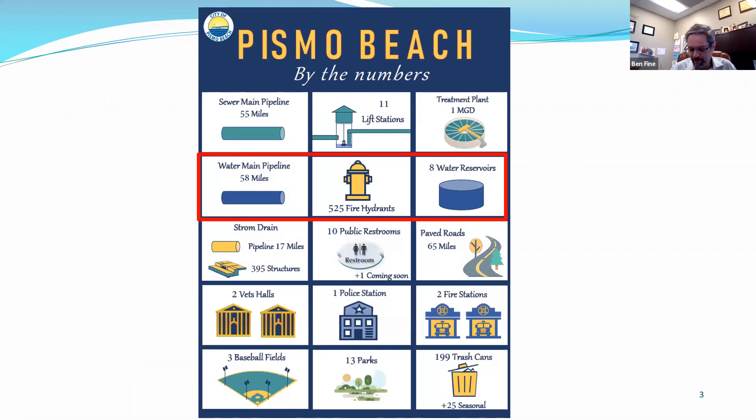But really what we're going to focus on is our water infrastructure. When you work in water and public works in general, when things are right, the public is completely blind to you. You are invisible, they don't even know you exist, everything's just great. But when things go wrong, people really get upset and you are the center of attention, they want to nail you to a stake and burn you. So if you're doing your job well, no one knows about it, and when you mess something up, no matter how small, everybody knows about it and they usually get pretty upset.

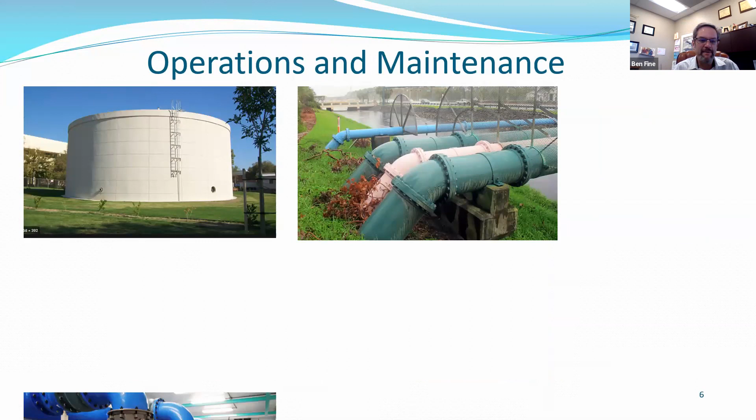As far as operation and maintenance goes, we'll look at reservoirs and the distribution system consisting of pipelines, booster stations, and valves. Looking at reservoirs, it's really important that you have an inspection program. Here at Pismo, we dive our tanks every 7 to 10 years.

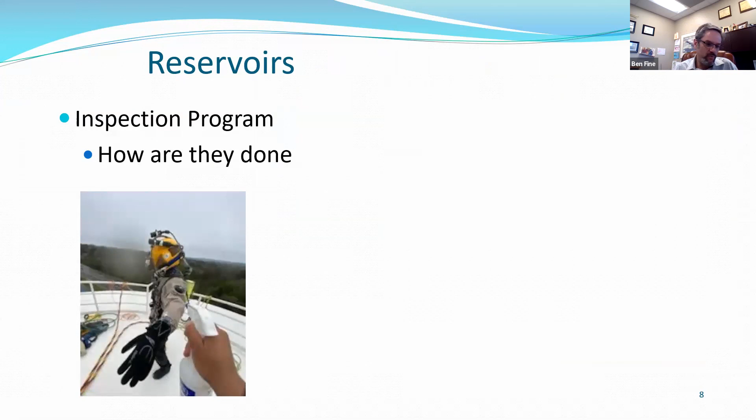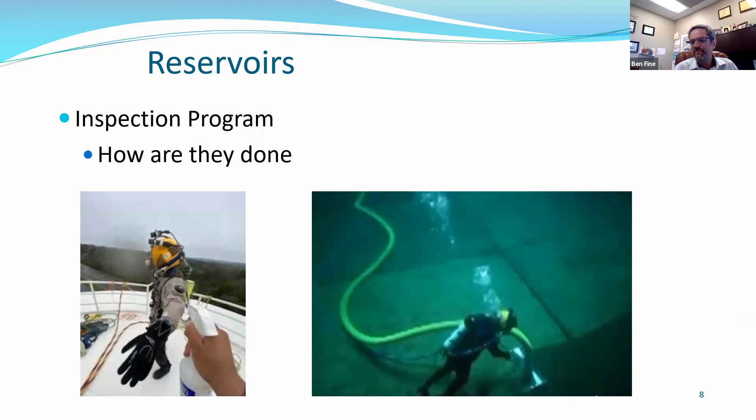So how do you inspect reservoirs? We dive ours. You have a certified diver, and the one we use is a registered engineer as well. He suits up, gets sprayed off with bleach, and jumps into the reservoir to inspect it. Then he provides a report with pictures on the condition of the inside and outside of the reservoir.

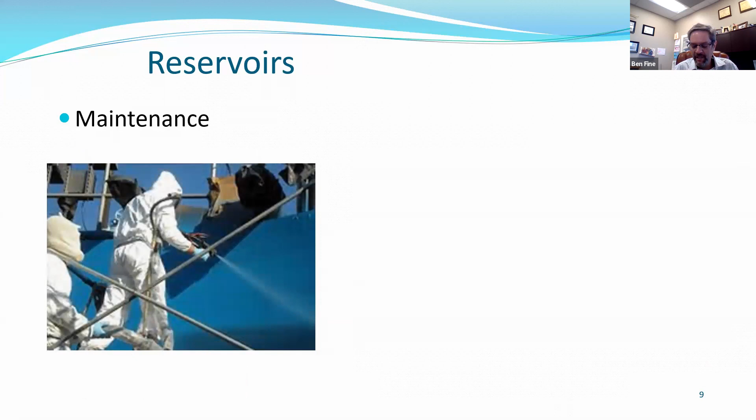Then we take that information and go out to bid for a project that usually consists of mitigating corrosion on the exterior and coating the exterior, and then cleaning and often coating the interior of the reservoir.

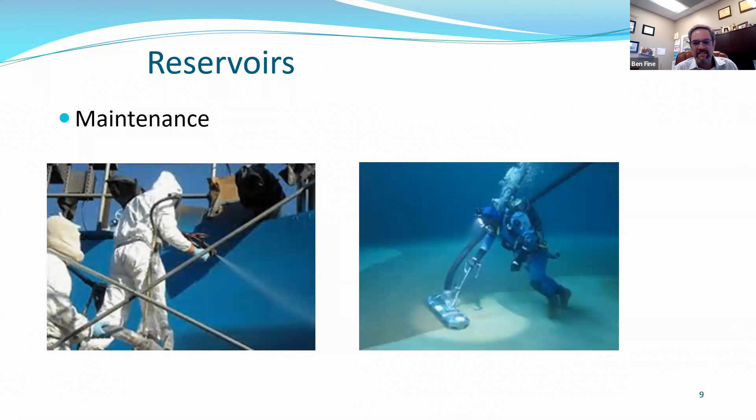At the city of Pismo, we have 2 concrete reservoirs and all the rest are steel. I bring that up because one of the things that's really important, especially with a steel reservoir, is cathodic protection, which is a way of controlling corrosion of the surface.

What it does is make the reservoir the cathode of an electrochemical cell. You do that by connecting it to a metal that's more easily corroded, a sacrificial metal that acts as an anode. Then you have an electrolyte between the anode and the cathode, which is the water inside the reservoir. Typically we'll use zinc, aluminum, or magnesium as the sacrificial metal to protect the reservoir.

Without cathodic protection, you can end up with a lot of corrosion. In fact, one of our reservoirs didn't have cathodic protection and the supports inside are pretty much gone. We're currently in the final design and will go out to bid probably in the spring to completely replace the reservoir.

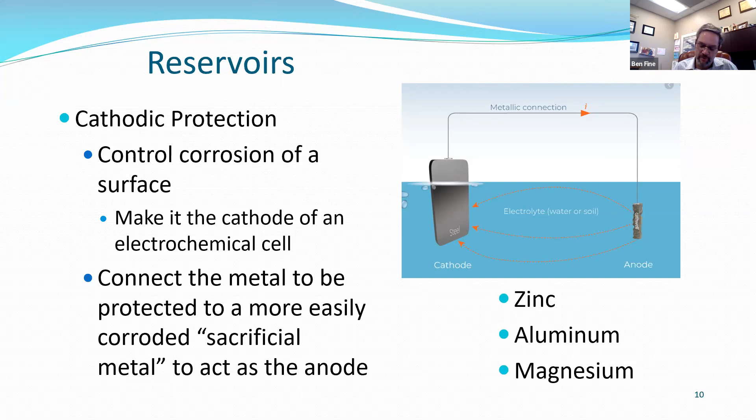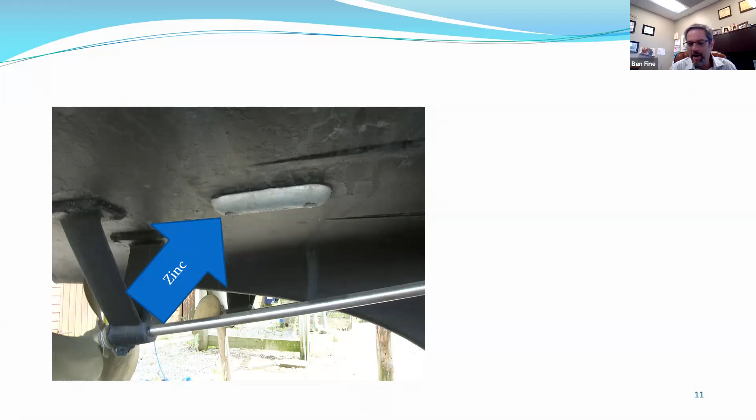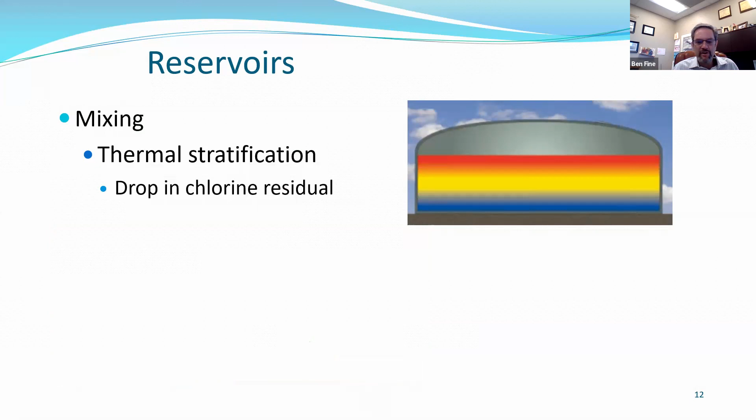Another form of maintenance or operation of the reservoir is mixing. Inside a reservoir, you'll get thermal stratification of the water. As the sun beats down on the top of the reservoir, it heats the water and it will separate into layers by temperature. What you'll see is a drop in chlorine residual, which is obviously not a good thing.

There's ways to mitigate this, usually with a mixer. This is a jet mixer. There's also a side mount mixer and a stand mixer that you can employ inside your reservoir to keep the water mixed up and ensure proper chlorine residual.

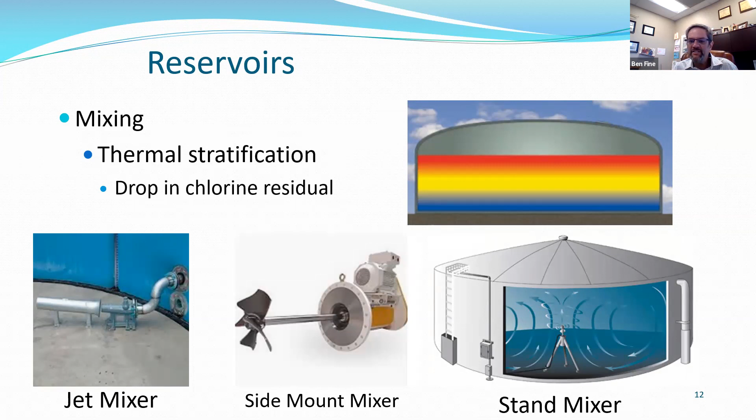As far as maintenance of the pipes goes, the big thing we do here in Pismo is flush our dead ends, mostly for water quality, not necessarily for the pipe itself. The operator flushes the line through the fire hydrant, which is in many cases how we do it, using a diffuser box to diffuse the water so it doesn't come out in a high pressure stream.

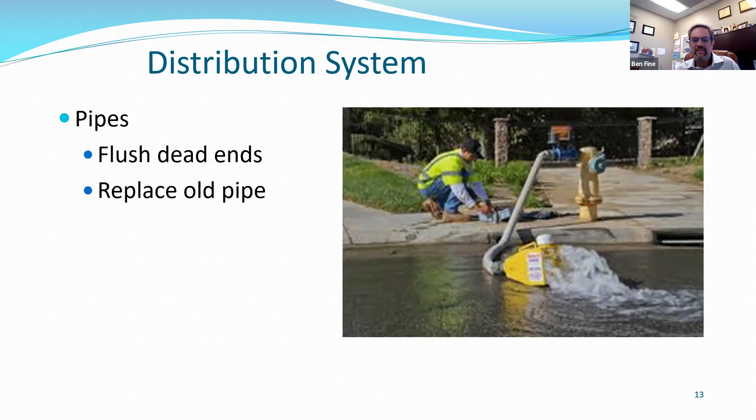And then also we'll throw in a dechlor tab to dechlorinate the water, because the water is safe to drink, but it's not safe to discharge to the environment, so we need to dechlorinate it.

It's important that you exercise your valves. In the olden days, it was done by hand. Many municipalities, including Pismo, have a valve turner where it'll exercise the valve. We go out and try to hit every valve at least once a year, and we'll open and close it 3 to 6 times. We also replace old valves, usually when we do street projects, because there's nothing more embarrassing than paving your streets and then having to come back and rip it up because a water valve failed.

One example of why it's important to exercise your valves, and it ties back to when things go wrong. When we were doing our Shell Beach Streetscape project, we replaced our water line and upgraded it to a 16-inch line to provide better flows. When the crews went out to shut off the water, we had a number of valves—4 of them throughout the project—that for whatever reason weren't exercised properly and wouldn't close.

So we closed the valve, but it's not closed all the way. The contractor thought, well, we can still replace the line anyways. They tried to replace the line and do the tie-in and they couldn't. So now they have to go to the next valve down the street and shut it off.

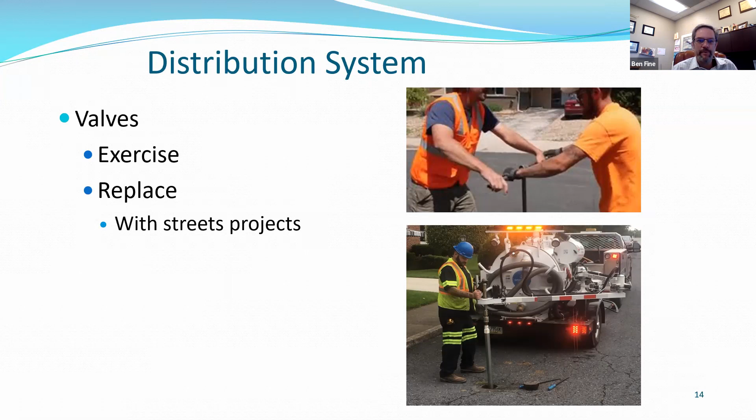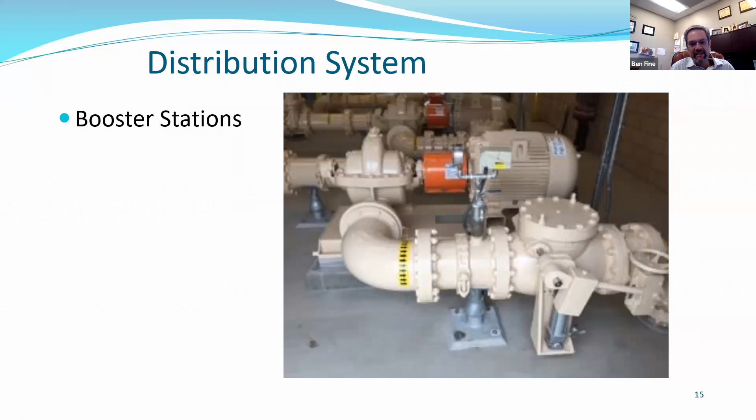Looking at booster stations, City of Pismo has 8, and there's quite a bit that goes into maintaining them, as far as pump maintenance, maintenance of the motors, and all the electronic equipment that goes along with it—the SCADA system, the pressure transducers and everything—to make sure it runs as needed when needed. About every 10 years, our guys will go and repaint everything to help protect it from corrosion from the elements.

I talked to you at the very beginning about water planning and how it can be difficult. State water and groundwater both follow a calendar year, whereas Lopez follows the Lopez water year, which runs from April to March. There's this chart I used to make for my city council, and they really loved it, but I really didn't. What I didn't like about it is that if you look at this...

I thought there was a laser pointer here. Maybe not. Anyways, oh, you know what? There is right here.

So if you look at, okay, in July, how much water do we have? Well, in July, we're midway through the state water year. We're at the beginning of the Lopez water year, and it's hard to say exactly how much water we have. When I generated this report, I said our remaining entitlements is 2,145, but that was in August. And state water runs out for the year at a different time than Lopez. So do we really have 2,145 acre feet, or do we not? Because at the end of the state water year, what happens to that leftover water that we did or didn't use? It becomes really difficult to convey to the council exactly how much water we do have.

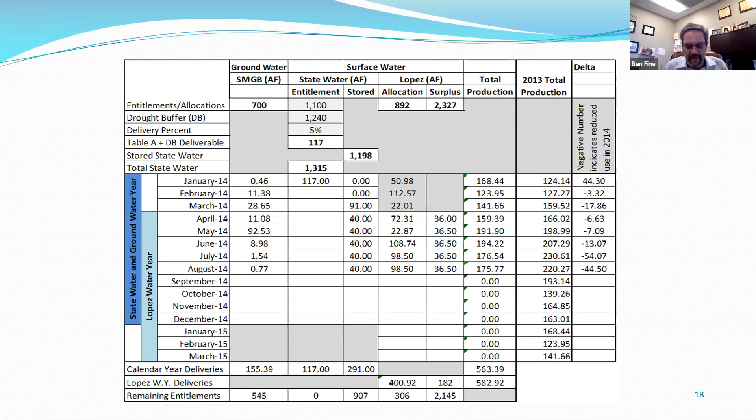So I actually did away with this chart. It kind of got the idea across, but most of them, it confused them more than it helped them, even though they're the ones that asked for it.

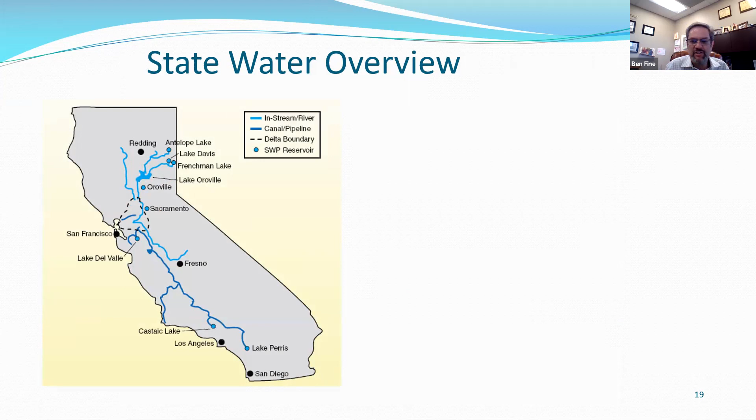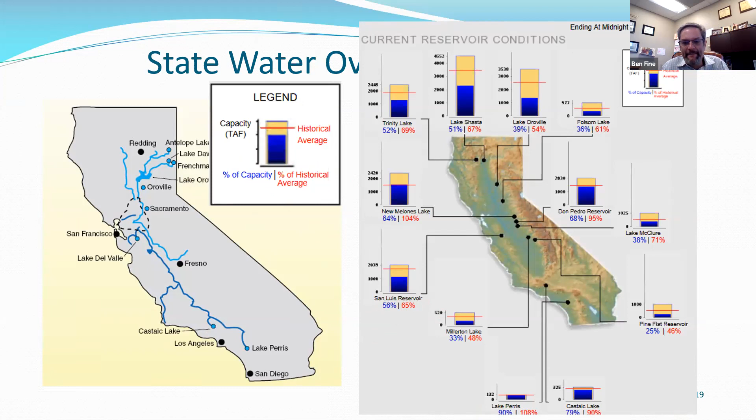This map here shows where the reservoirs are as of March 11th. You can see the blue number is the percent of capacity and the red number is the percent of historical average. Of significance to the Central Coast and us here in Pismo is San Luis Reservoir, which is at 56% capacity and 65% of its historical average. We'll talk a little bit more about San Luis Reservoir later.

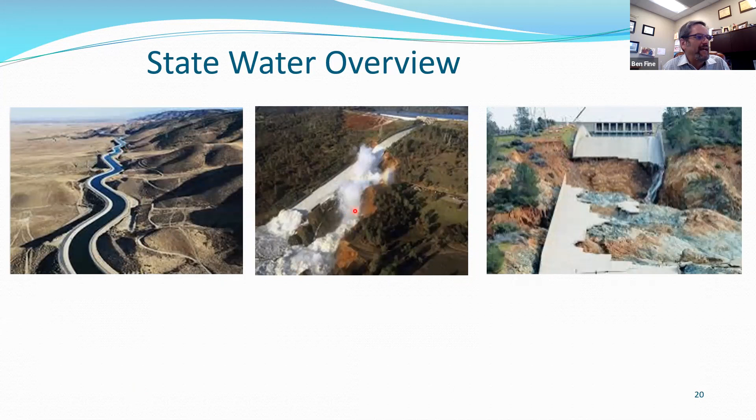And then these pictures show some state water infrastructure, an aqueduct, and you can really see how long and vast it is. Another thing to note is it's actually quite vulnerable. The State Water Project provides drinking water for much of the state, and it's just an open aqueduct. I threw these pictures in here - this is the Oroville spillway that experienced some failures a few years ago. Just wanted to throw them in there.

As far as state water goes, most state water contractors or subcontractors have what's called a Table A allocation. For the city of Pismo, the county recognizes 1,240 acre feet. We did sell 100 acre feet to a third party, so we have 1,140 acre feet. You can also buy what's called drought buffer, and we do have drought buffer in the amount of 1,240 acre feet. Drought buffer helps to improve the reliability of state water. It can only be delivered when deliveries are less than 100%.

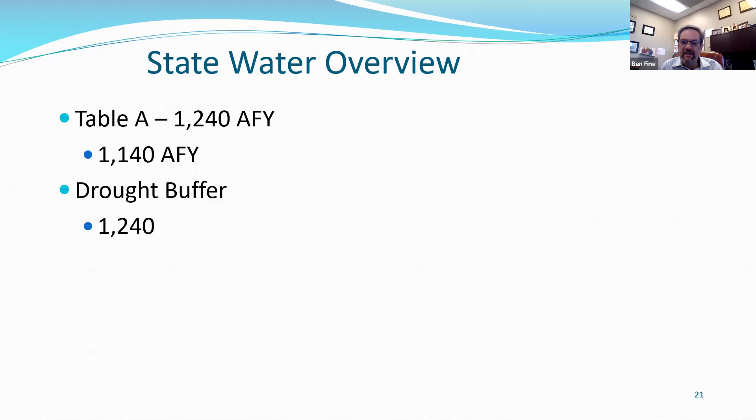I'll show you how that works here in a minute. It also increases the amount of water that you can store. So when deliveries are at 100%, the city of Pismo gets 1,140 acre feet - it's actually 1,240, but there's that 100 off the top that we sold. Then at a 50% delivery, we get 50% of our Table A plus 50% of our drought buffer, so we end up with 1,190 acre feet. You can see how the drought buffer really helps to improve the reliability of your water delivery. One thing to note is in no case may our deliveries be more than our Table A.

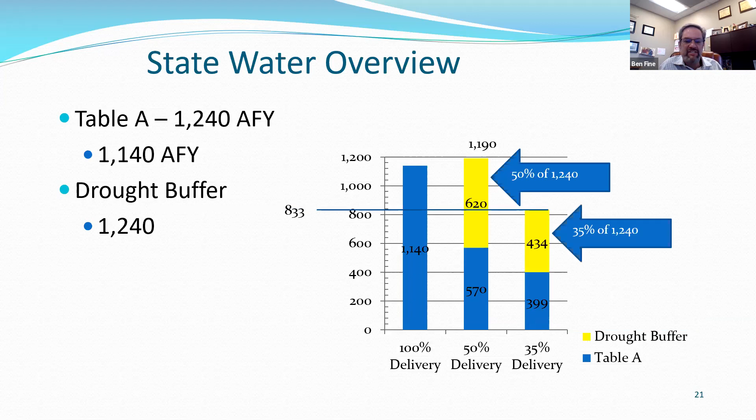So the drought buffer can only make up to a full allocation of our Table A allocation. Another example: at 35% delivery, we'd end up with 399 acre feet of Table A, 434 of drought buffer, for a total delivery of 833 acre feet. So you can really see how that improves the reliability.

So you can see that while state water is really beneficial in that it's geographically diverse - it can be completely bone dry here on the Central Coast, but if it's raining up in Northern California, the State Water Project will have a healthy delivery and will be okay. It's good in that sense, but you can see that there's a wide fluctuation in the deliveries, and that makes it hard for water planning.

You can store state water, and it's a little confusing to some on how that works, but there are equations you follow. If deliveries are between 0 and 50%, you can store 25% of the available water. Your available water is your Table A plus your drought buffer. Right now our deliveries are at 10%, so we can store 25% of our available water. Take our Table A plus our drought buffer, that's our available water, and you can store 25% of that.

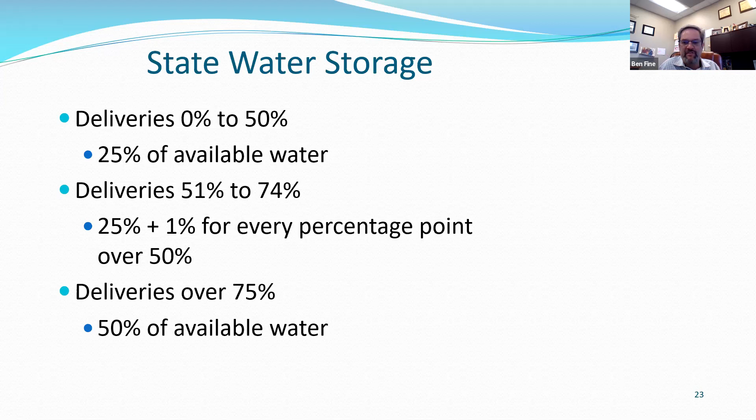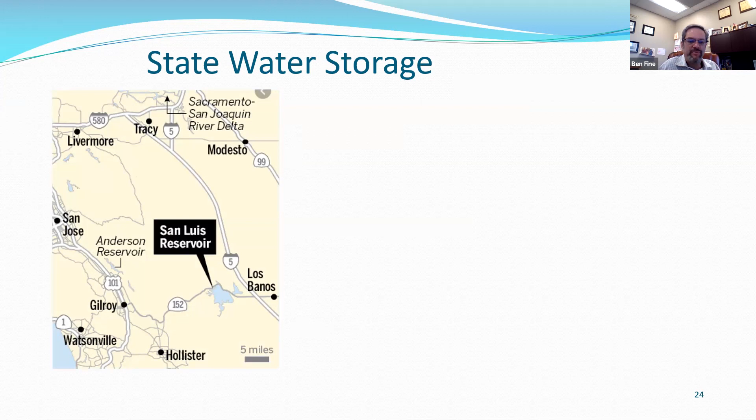So where is that water stored? It's stored in San Luis Reservoir, which is why San Luis Reservoir is so significant to us. One of the problems with storage in San Luis is we have zero local control. It's a little difficult to get the water delivered, not extremely, but there are some hoops to jump through with the county, since the county is the contractor. But more importantly, when San Luis Reservoir spills, we lose our stored water.

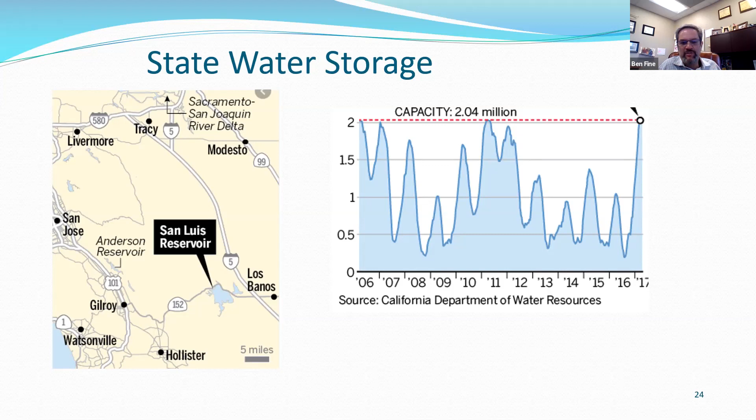San Luis Reservoir is an off-stream reservoir. There are no streams that feed it. There is a small watershed, but most of the water in San Luis Reservoir is piped there through the State Water Project. Most of the spills we see are from moving water through the Delta. There are real constraints on moving water through the Delta, mostly environmental constraints dealing with endangered species. So when there's a window to move water through the Delta, depending on how the other reservoirs are looking, DWR will pump a lot of water through, and that causes spills in San Luis, which means we lose all of our stored state water.

Lake Lopez, I'm sure many of you are familiar with it and have played there. It supplies drinking water for what's referred to as the Zone 3 agencies. It's owned and operated by the San Luis Obispo Flood Control and Water Conservation District, Zone 3 for short, which includes Arroyo Grande, Grover Beach, Pismo Beach, Oceano Community Services District, and County Service Area 12.

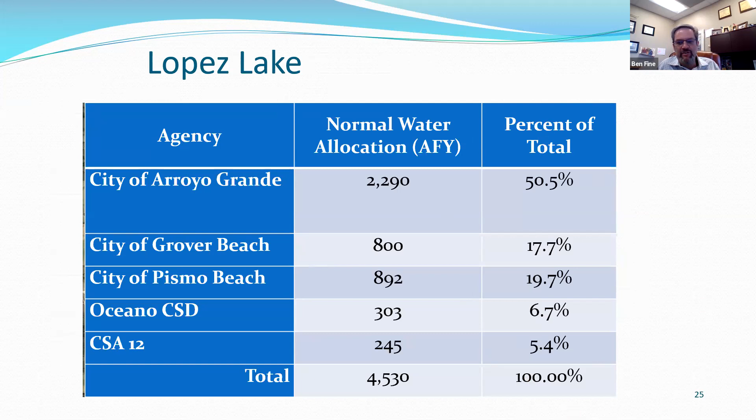So these are the allocations of each agency, and what's of particular importance is the percentage. The reason is when we don't use all of our water in a given year from Lopez - we have 892 acre feet - let's say at the end of the year we had 100 acre feet left over, that water goes into a surplus water pool. Each agency is entitled to the water in the pool by their ownership percentage of Lopez. So if the city of Pismo saves 100 acre feet of water, the city of Arroyo Grande is entitled to 50% of that surplus.

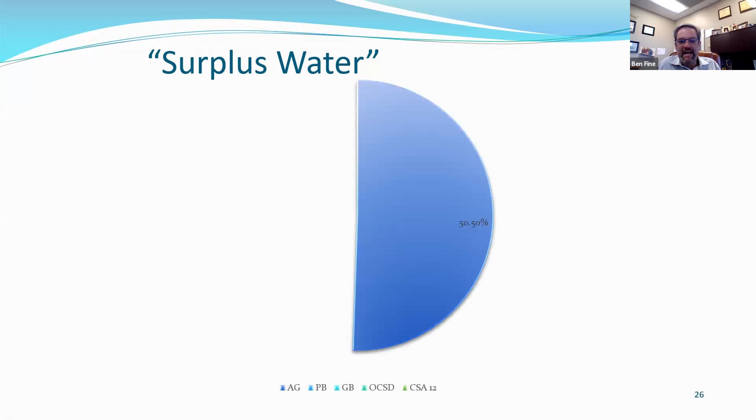We only get 19.7 acre feet of the 100. Grover Beach could have access to 17.7 acre feet of the 100. OCSD just under 7%, and CSA 12, County Service Area 12, 5.4%. Another caveat of surplus water is you have to use it the following year. So in addition to only getting 20% of that water, or said another way, losing 80% of our saved water, we have to use it the following year if we want it, and if it's not used, it just reverts back to district water.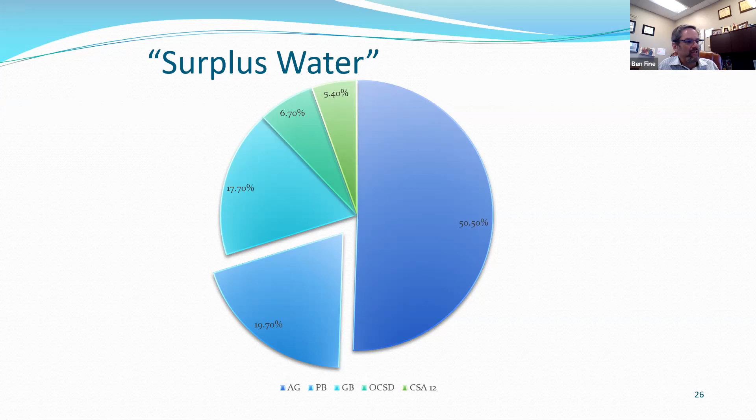That makes it difficult for us to really want to save and conserve Lake Lopez, which is a shame because it is a local resource. It is a shared resource, but we're disincentivized by our contract to save and protect that resource.

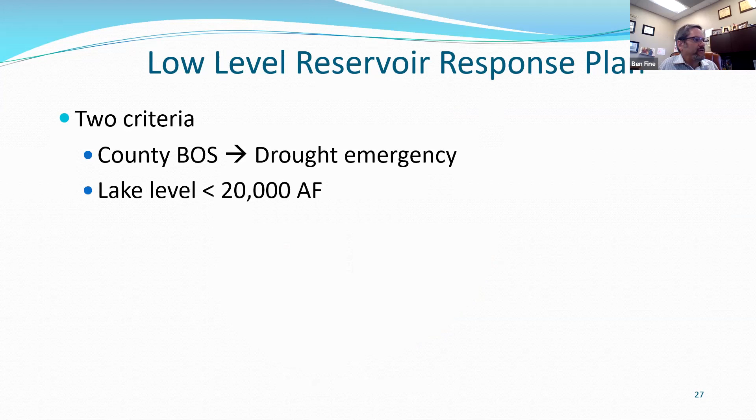We did develop a low-level reservoir response plan in 2013, when we hit the beginning of the major drought. There are two criteria to enter it: one, the County Board of Supervisors has to declare a drought emergency with respect to Zone 3, and two, the lake has to drop below 20,000 acre feet. There are some prescribed cutbacks as far as deliveries go. The key component of the low reservoir response plan is that agencies retain 100% of their surplus water, and that water carries over every year with evaporation losses until we exit the low level reservoir response plan.

So there are some cutbacks though. At 20,000 acre feet, we establish storage rights. At 15,000 acre feet, we take a 10% cut to municipal deliveries. At 10,000 acre feet, a 20% cut. At 5,000 acre feet, a 35% cut.

And 4,000 acre feet is just about dead pool of the reservoir, and we can't pump water out of it anymore. The water won't flow out of it anymore. It can be pumped, but it's dirty and murky, so we take a 100% reduction at that elevation. When we developed the LRP, we started saying to ourselves, well, if we're developing storage rights for an emergency, why don't we work towards that long term?

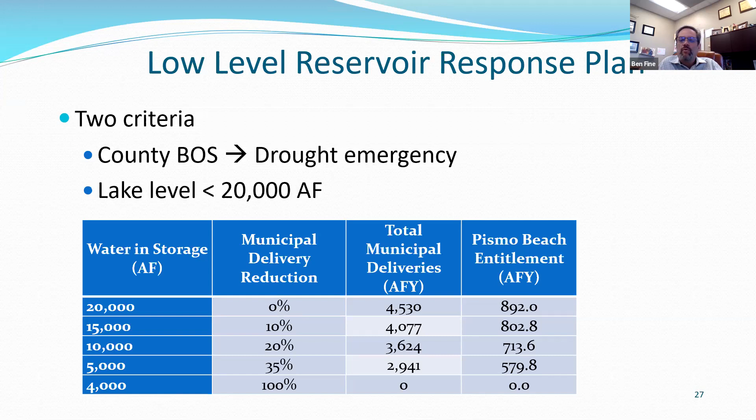So the Zone 3 agencies, along with the County of San Luis Obispo, have been working on contract revisions. I've explained to you how long-term water planning is difficult because of the fact we don't retain 100% of our stored water, and we have to use it the next year. We lose our saved water.

So the benefits of the contract revisions is that it'll allow for storage rights. It'll allow us to better use all of our water in a holistic manner. There's a provision where we can store state water there, and then we can take full advantage of Central Coast Blue, which I'll provide you information about in just a minute here.

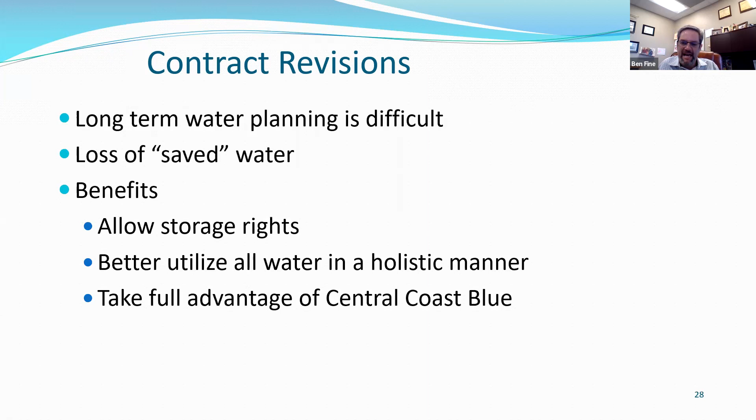Our final source of water is the Santa Maria Groundwater Basin. It is an adjudicated basin. The management group that manages it is the NCMA, or the Northern Cities Management Area. That was a group that was set up by the courts. There's also the Nipomo Mesa Management Area and the Santa Maria Valley Management Area. Those are all dictated by the courts.

For the NCMA, we actually have allotments that we're allowed to pump that are in the adjudication. The other areas don't have those specific numbers, but we do. But long before the adjudication, Arroyo Grande, Grover, Pismo, and the OCSD worked very cooperatively to protect the groundwater basin. And we actually came up with these numbers through what we refer to as the gentleman's agreement that was later adopted into the stipulation to protect the groundwater basin to prevent saltwater intrusion.

We are the canary in the coal mine, so to speak. If there is saltwater intrusion, it's these agencies that are going to feel it and really be damaged. Folks on the Mesa and down in Santa Maria, they have a buffer before the saltwater gets to them.

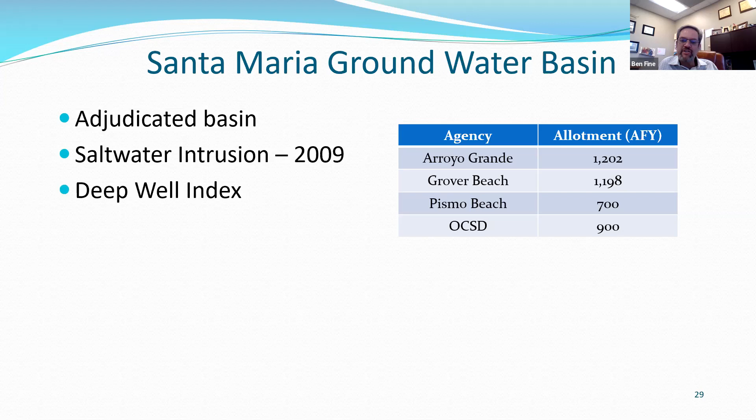There were constituents consistent with saltwater intrusion detected in the basin in 2009. And the NCMA has developed what we refer to as the Deep Well Index to monitor the health of the Santa Maria groundwater basin. We established a threshold of 7.5 feet elevation, which is right here. And you can see this chart goes back to the mid to late 60s, and it has the Deep Well Index. It's a combination of 3 monitoring wells.

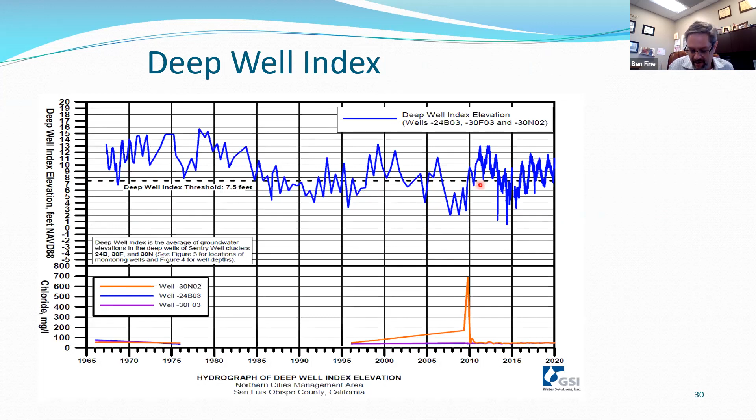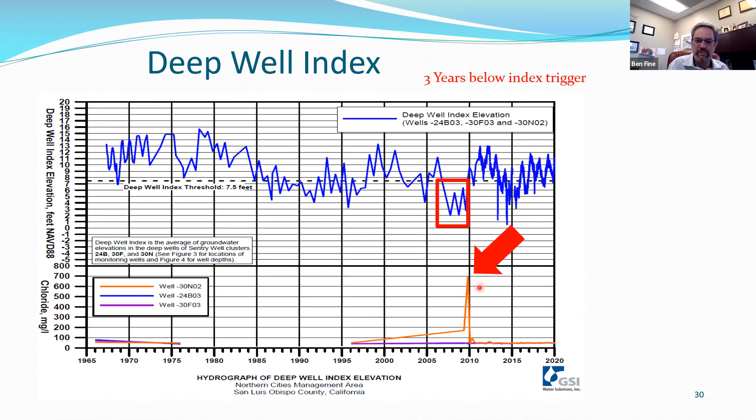You can see that here, starting in the mid 2000s, that we dropped below that 7.5 foot threshold, and we were there for 3 years below that trigger level. You'll see here that the chloride levels spiked, which is kind of an indicator of saltwater intrusion. So all the agencies really drew back on their pumping. We're currently pumping about 30% of those numbers that I showed you previously to ensure that we don't have saltwater intrusion. And you can see here, this shows the Deep Well Index going back to 2015 quarterly measurements. We've done a really good job of keeping the groundwater basin levels above this threshold.

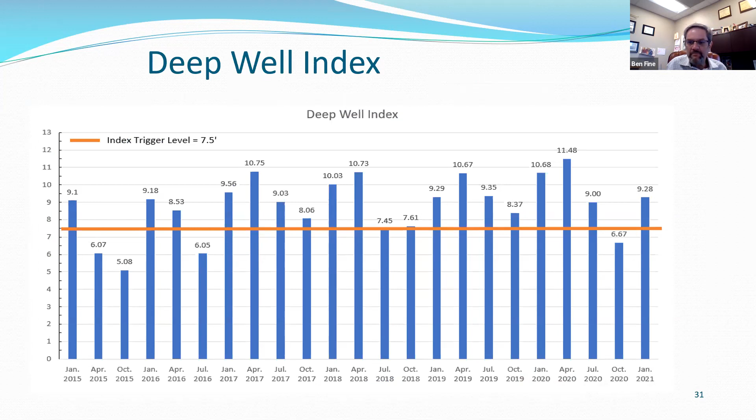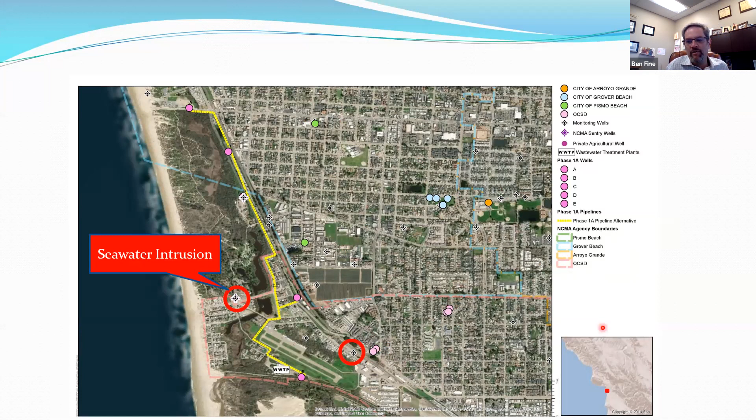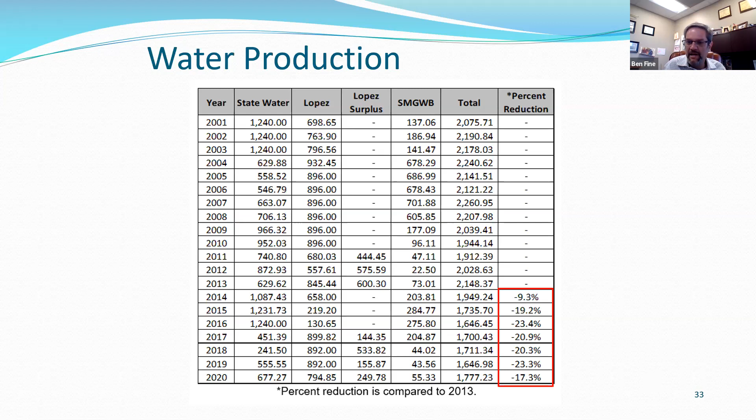Our community's really done a good job. Our council has developed some water conservation programs, including the first waterless urinal mandate that I could find on record, as well as a mandate for half gallon per minute aerators on all publicly accessible restrooms, including hotel rooms. We also have water conservation rebate programs. So hats off to our community.

So Central Coast Blue. Some of you may know about it, some may not. I'll give you a brief update. Central Coast Blue is a regional groundwater sustainability project, a recycled water project that takes effluent from the city of Pismo Beach wastewater treatment plant in phase 1, purifies it, and injects it into the groundwater basin.

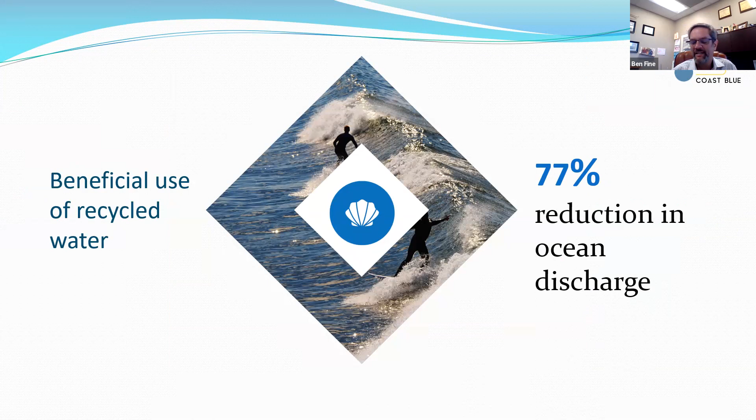So we have these 2 agencies: the city of Pismo Beach, and the South San Luis Obispo County Sanitary District—I'll just call them the district from now on. The district provides wastewater services to Grover Beach, Oceano, and Arroyo Grande, but we're working together for lasting water independence.

The project started when the historic drought really highlighted vulnerabilities in the city of Pismo Beach and our neighboring agencies' water supply portfolios, which I shared with you—State Water, Lopez Water, and Groundwater. The project started as a Pismo Beach project.

We did a recycled water facilities planning study that identified the best supplemental water source. We looked at recycled water. We looked at raising the Lopez spillway. We looked at several different sources of water, and it really pointed to recycled water.

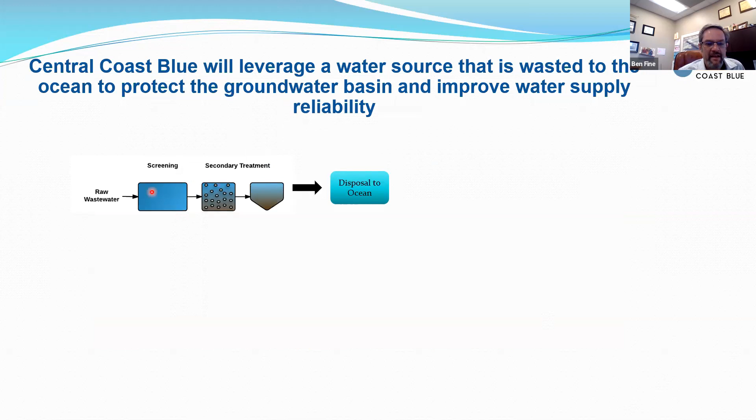Looking at this, this is the city of Pismo Beach treatment train here, with disposal to the ocean. Central Coast Blue will add the advanced water treatment—I'll go over these processes later. There'll still be a disposal to the ocean in a brine, and then the water will be injected into the groundwater basin, have contact time in the water table, be drawn through our existing potable water wells, municipal wells, and delivered to the community.

Currently, the state of California does not have regulations to allow direct potable reuse, which is why we need to do indirect potable reuse, where it's injected into the groundwater basin and then extracted later.

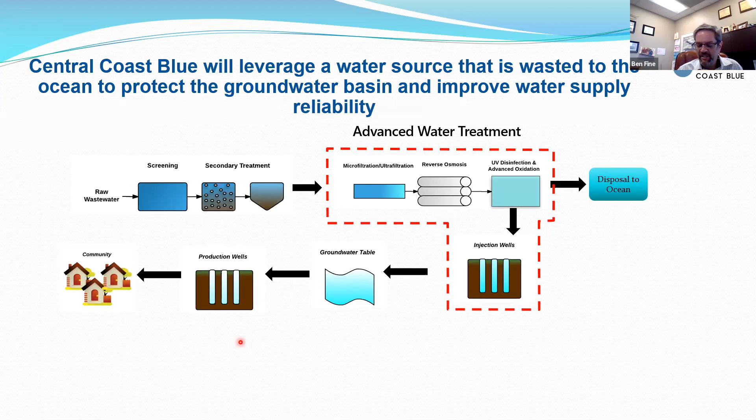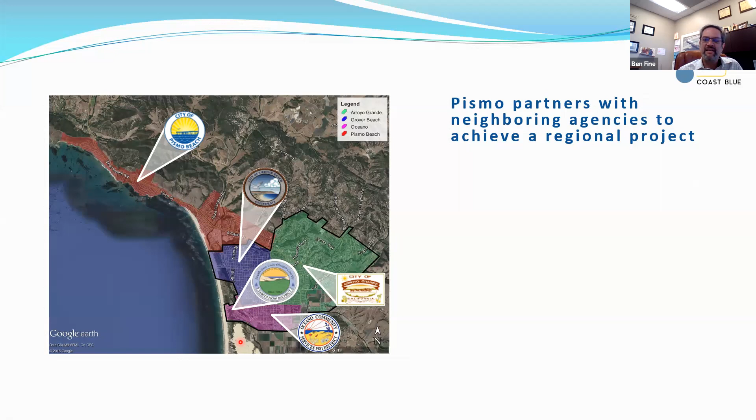Interagency collaboration has really been key to the project's success. We're all small agencies with small budgets. So the EIR for this project was funded 50-50 by the city of Pismo and by the district. And again, the district is funded by the ratepayers of Arroyo Grande, Grover Beach, and Oceano. So all 4 of the agencies really participated in the EIR.

We developed a groundwater model that looks at the entire Santa Maria groundwater basin, from its northernmost reaches all the way to the Santa Maria riverbed. That water model was funded by a Prop 1 grant. The water board and the county participated through Zone 3, along with the district and the city of Pismo.

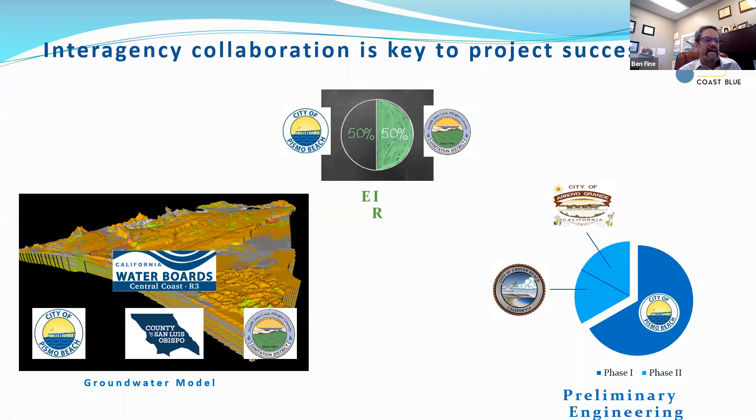As far as preliminary engineering goes, phase 1 of the project will treat and inject effluent from the city of Pismo Beach wastewater treatment plant. Phase 2, if deemed necessary and feasible, will treat and inject water from the district's wastewater treatment plant, and that'll be funded by Grover Beach and Arroyo Grande, 50-50.

External funding has really opened up new opportunities. We did successfully receive a Prop 1 grant, for just under $1.5 million. The water board worked with us, and they were really intrigued by Central Coast Blue and liked the idea of it. They've seen other successful projects in Monterey, Oxnard, and Orange County. So they really wanted to support us, and they said if we could increase our matching funds for the project, they'd increase the grant award to $2 million.

So we did increase our matching funds, and they did increase the grant. What this paid for is a test injection well. It allowed us to update our monitoring plan, our basin level response plan, a leaching study, and offshore aerial geophysics.

If you're not familiar with aerial geophysics, here's what we did: we hired a company that came down from Canada with a helicopter and an electromagnetic array that they hung from it, and they flew the coast. First they fly perpendicular lines, which gives them an idea of where the freshwater-saltwater interface is.

The saltwater is more dense, and it shows up as red. The brackish water is orange, yellow, green, and the fresh water is blue. Once they have an idea of where that interface is, they start flying parallel to the shoreline gathering data. This is really helpful for us to know where that interface is, to see what threat saltwater intrusion poses. One caveat is they can't fly over populated areas.

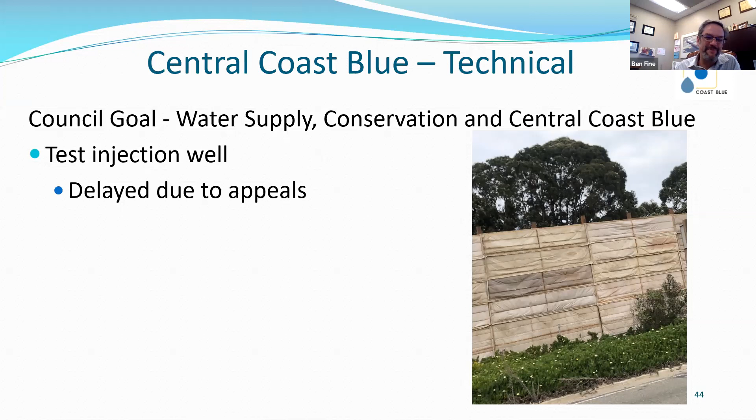Our contractor almost left—they told us they couldn't perform, since they had another job lined up with another agency. I actually have a very good relationship with that agency; the director down there is my former boss, former director here in Pismo. So we were able to work out a deal to allow the contractor to do our well and then go do their project.

The monitoring well has been completed, the ocean outfall has been completed, and the drilling of the well has been completed. They're currently testing the pumps and getting that all set up. Once that's done, we'll run some tests—a travel time test and a contact time test—with that well.

Also, when we did the drilling, we collected soil samples and took cores. So we really are gaining a lot of information about the basin, its makeup, and how the basin will react once water is pumped into it. We're expecting all this to be wrapped up by the end of the month.

And what's being referred to as the Great Wall of Oceano, that sound wall you see in the picture, will come down. That sound wall is this heavy fabric, and it's really amazing—when you're inside the walls, you can't hear the traffic at all, and when you're outside the walls, you hear the traffic but not the pumps or the drilling rig.

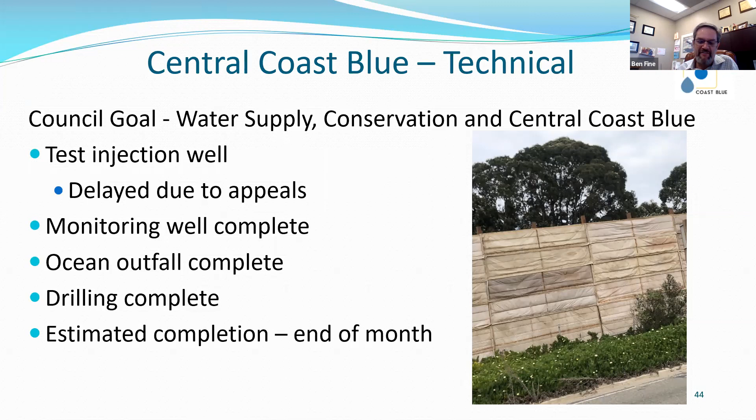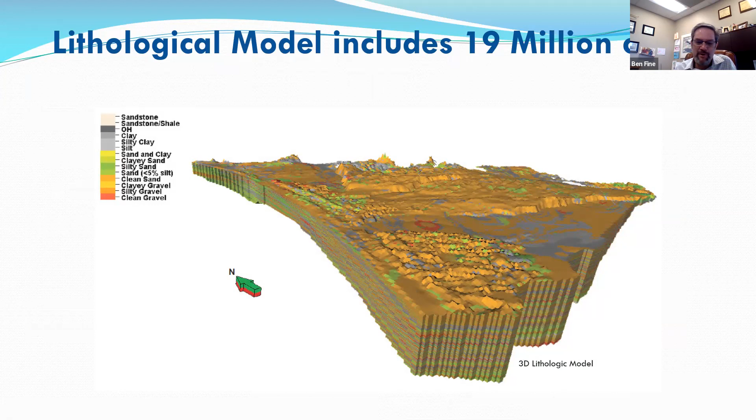It's really amazing, looking at the lithological model, it includes 19 million cells. This is just a snapshot of the model. I found it very interesting, the amount of data that's contained in this. And what's really amazing is just 10 years ago, in order to produce and run this model, would have taken a computer that filled a room. Now with today's computing power, they're running it with just a normal desktop computer, which blows my mind.

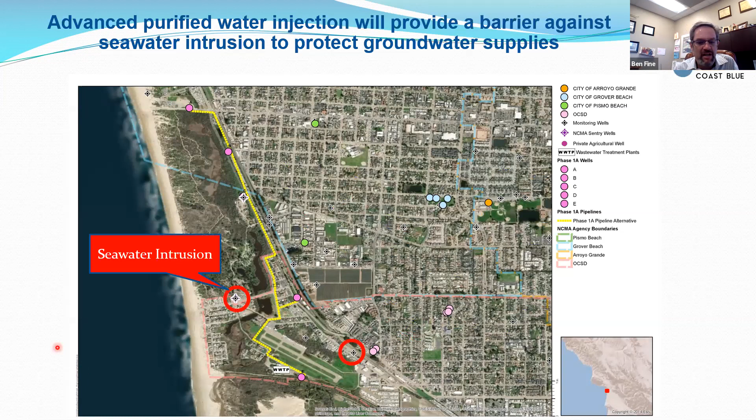So moving on, the yellow line that you see there shows proposed injection wells. This is where we saw saltwater intrusion. So the injection wells are located here with the infrastructure to deliver it, and then our production wells.

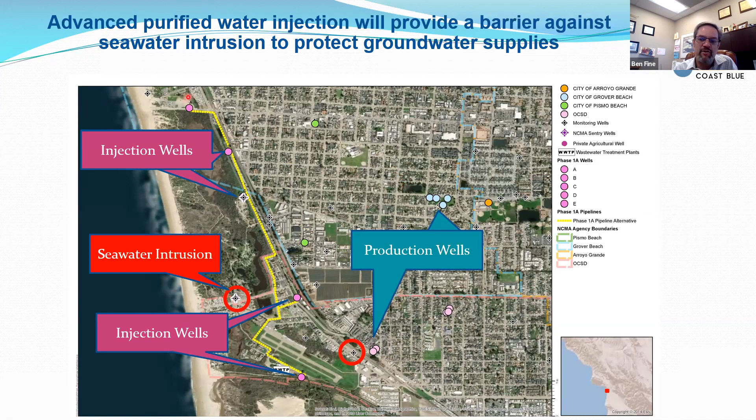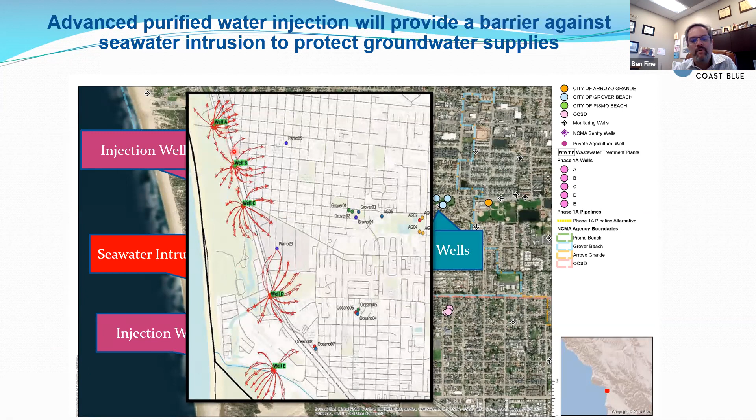So what you see is that not only are we providing water to drink, potable water, but we're creating a saltwater intrusion barrier. And what the model showed us is that when we inject the water, a portion of that water does go to creating a saltwater intrusion barrier, and then a portion will migrate towards the wells.

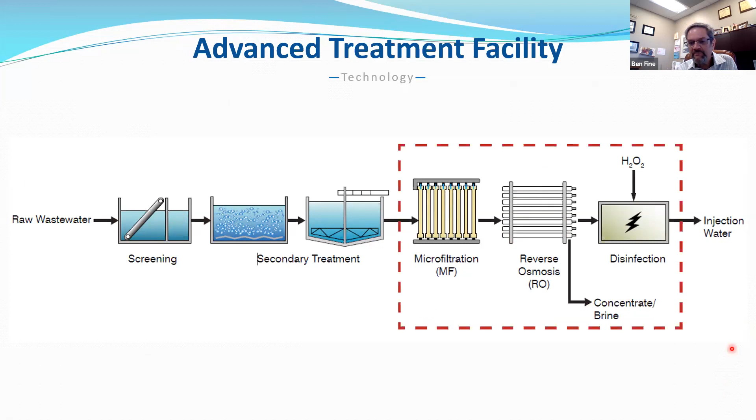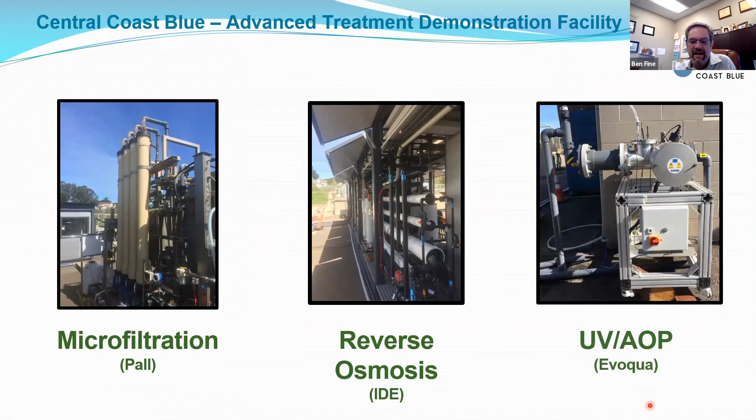Pall provided the microfiltration, IDE the reverse osmosis. And what was really amazing is if you have an RO system under your sink, this is the exact same technology, just on a grander scale. And then Evoqua provided the UV advanced oxidation.

And we did tours, we invited the public to come and tour and taste the water. What we did is we had 2 cups, labeled A and B, one was filled with tap water from the City of Pismo, and one was filled with plant water, or recycled water. We had folks taste them, and then we took a poll: how many people thought cup A tasted better, and how many thought cup B tasted better? About 70% of the people who tasted the water thought the recycled water tasted better, which was really interesting.

So the pilot plant really helped us with acceptance. The demonstration facility promoted regional stakeholder engagement. It really allowed us to performance test the equipment that we want to use, and really promoted innovation and refining design. It helped us not only gather a bunch of data, but analyze our proposed design and make operational improvements to that design.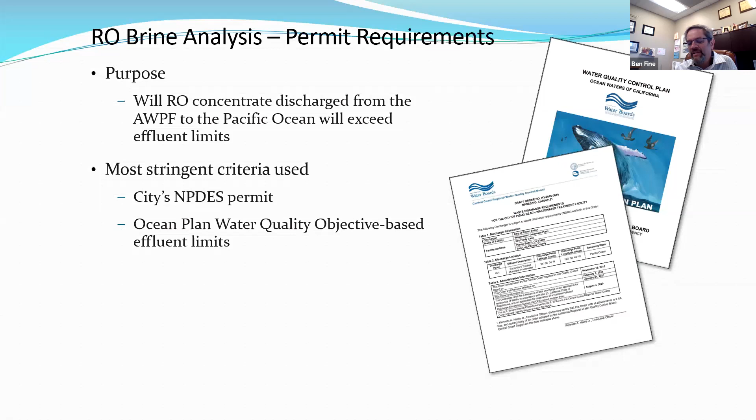So the project that we're going to build isn't what we originally thought we were going to build. We did some tweaking thanks to the pilot plant. One of the big things that came out of it is we thought we were going to have to mix the brine solution with potable water to meet our discharge permit. What we found is that we analyzed the brine, and it meets the city's NPDES permit. We were really happy to find out that we don't need to dilute it, and that it is safe to discharge directly through the outfall.

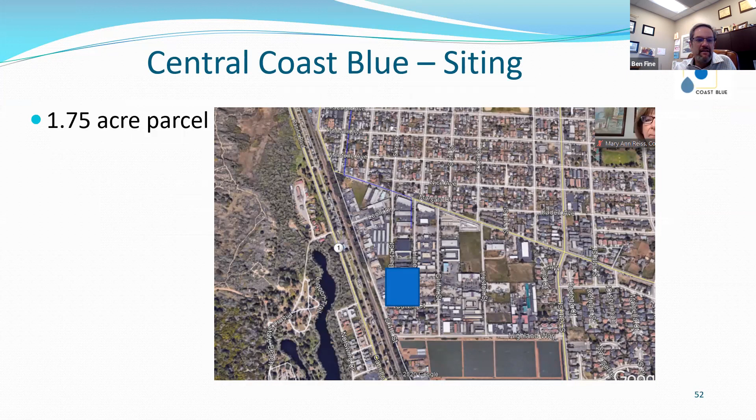So we have purchased a parcel, a 1 and 3/4 acre parcel in the city of Grover Beach, located right here on Hubner Street. Here you can see 1 is the City of Pismo Beach treatment plant, 2 is the district's treatment plant, and then this is the parcel that we bought.

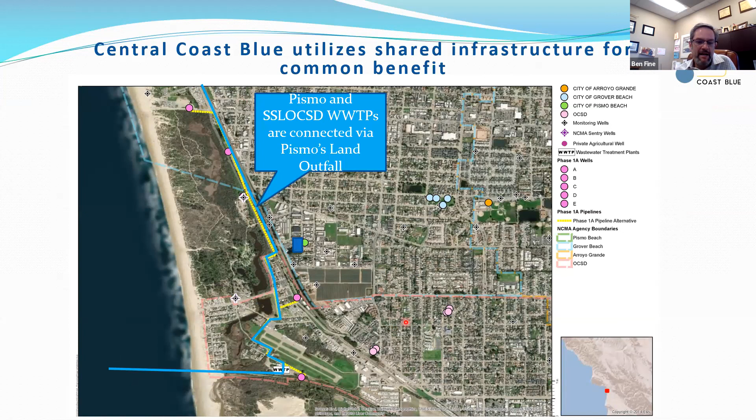So our ocean outfall line runs down right through here, this blue line, and the parcel that we purchased is right there, just adjacent to the line. So what we'll do is we will cut our outfall line and divert it. We'll bore under the railroad, divert it to this site, and then we'll have a line that goes back to the ocean outfall to discharge the brine.

It'll really help on infrastructure implementation costs, because the outfall is already there. We'll just have to build the distribution system to get the water to the injection wells.

As far as governance and cost sharing go, we prepared a draft MOA that was approved by all the agencies. A final MOA, which we're now calling an operating agreement, has been distributed to the agencies. Our city council will consider that this evening.

Should they authorize it, our city manager will sign it. Grover Beach will consider it on the 22nd, and Arroyo Grande on the 23rd. So those are really some huge milestones. We did recently certify the EIR, which is another huge milestone.

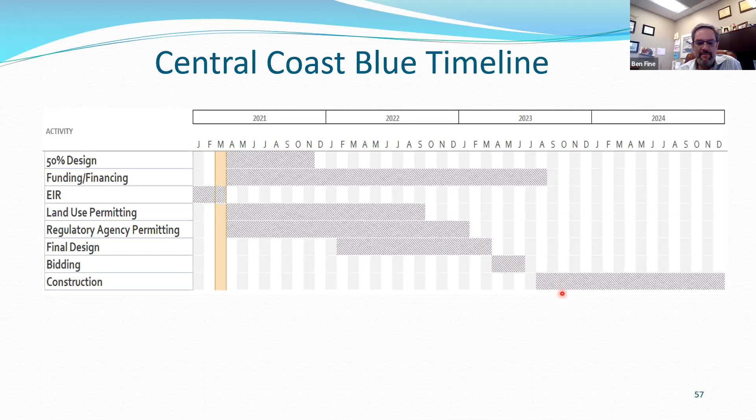So that concludes my presentation. I'm more than happy to answer questions on any part of it if you have any. And if not, that either means I did a really good job, or a really bad job and you didn't even get enough information to formulate a question.